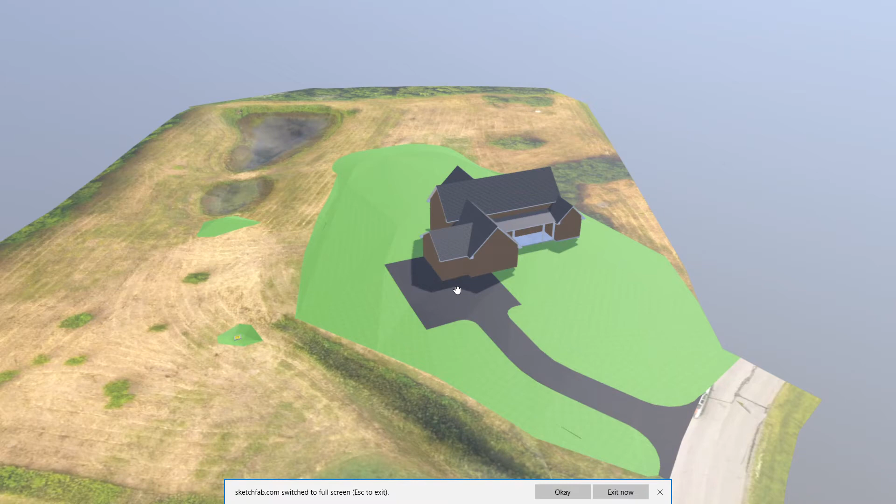Alright, this is an overall view of the project. The lighter green areas are all of the fill site work we need to do. You can see where the existing site is now, a little clearer hopefully.

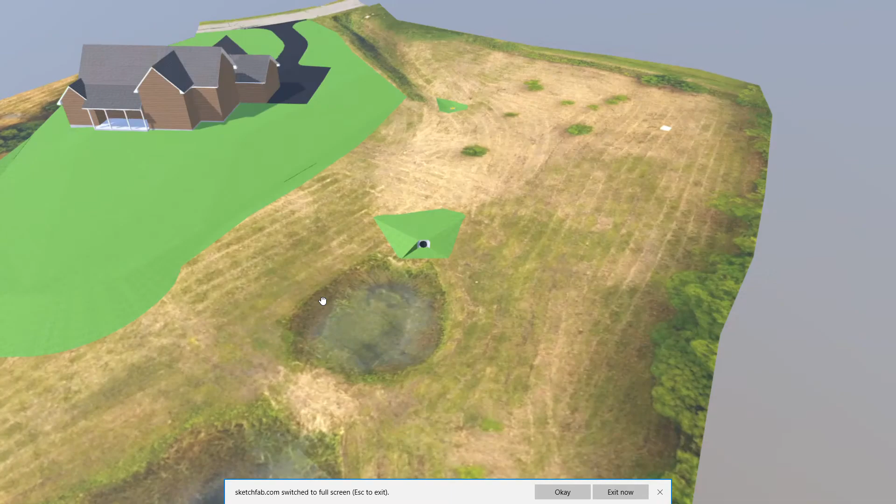So what I did is I created a little bit of a depression in the existing site right here. We've added a catch basin there, so the flow from the ditch will come down and collect in this depression here, and then it will be piped from there to this outlet. So what we would do is just grade that outlet pipe to the forebay, grade it back into the hill at a nice gentle slope so it kind of blends in with the surrounding area.

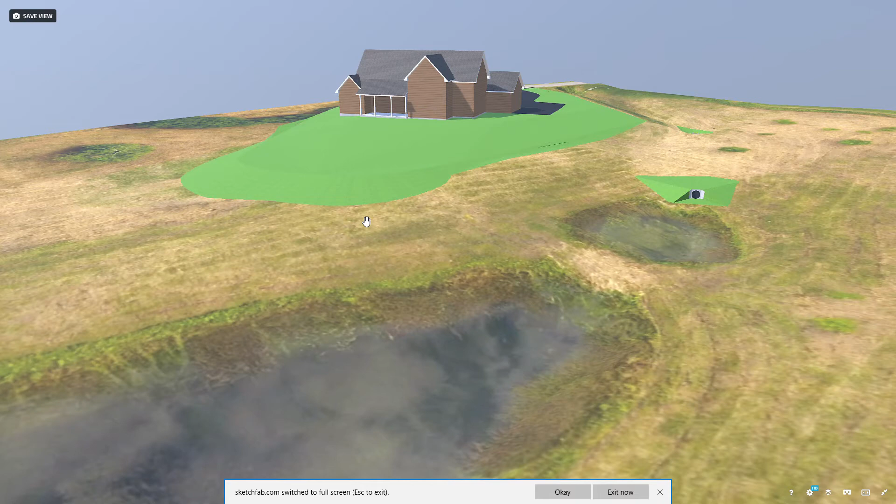Hopefully this is a little bit better view of the proposed grading too. You can see we just got a gentle slope in the backyard coming down, and then at the end of the backyard we've gently tied into the existing site. So yeah, that's kind of a general aerial overview. Of course, you'll have access to the model as well.

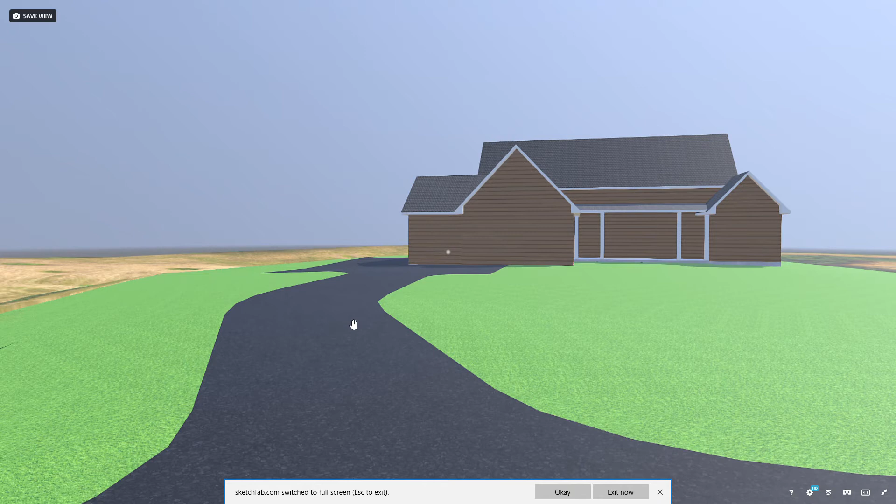Okay, so I also wanted to give you kind of a first-person view of the project. If we look over here, I'll take you over to the ditch, looking at the ditch from the road. So that's kind of what you're looking at with the driveway in relation to the ditch. So we would just feather it in along the top of the ditch here, leave it as is. Doesn't seem like it would impact the yard too much. You got a pretty good size front yard over this way as well.

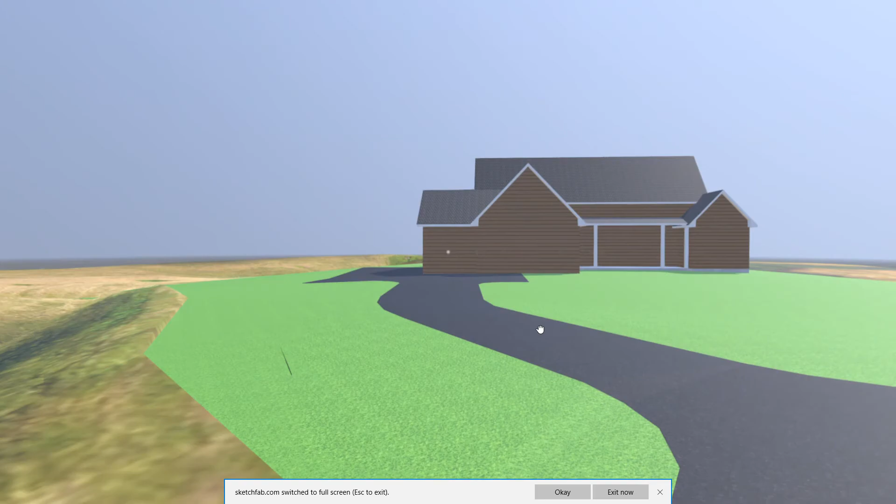So we'll just take a walk around the property here. There's the pond, there's your outlet structure down here, and the house. And right here you can't see the top of the drop inlet, but that's the inlet at the end of the ditch, and it'll get piped here as well.

Keep in mind too that the edges on this model are a little bit sharper, well, actually a lot sharper than they're going to be when the contractor's done. That's just because it's a computer model and it's a little bit tough for the model to smooth everything out the way a contractor would.

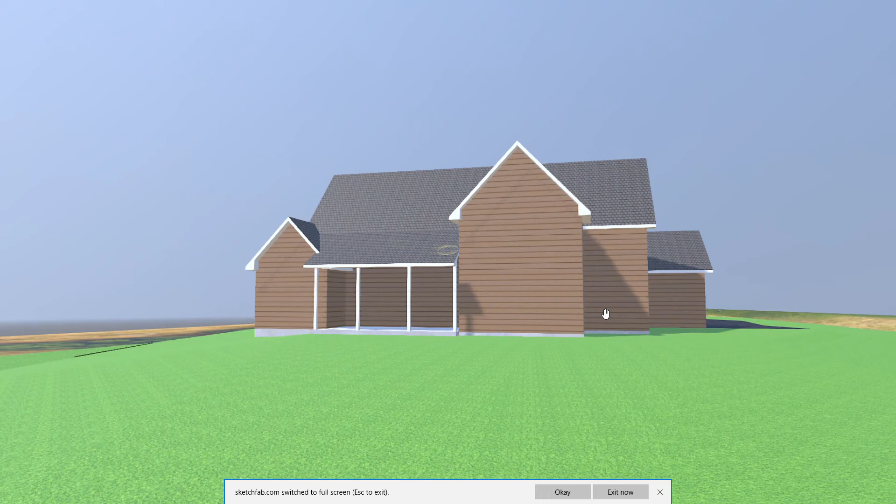So here we're standing at the end of the backyard. And look back this way, it's the back of the house, back porch. We'll turn around and look at the pond. The imaging for the pond got a little bit distorted with that severe elevation change, but it gives you kind of an idea of what the topography around the pond is going to look like from the yard. So those were the major things I wanted to just point out, and that's about it.